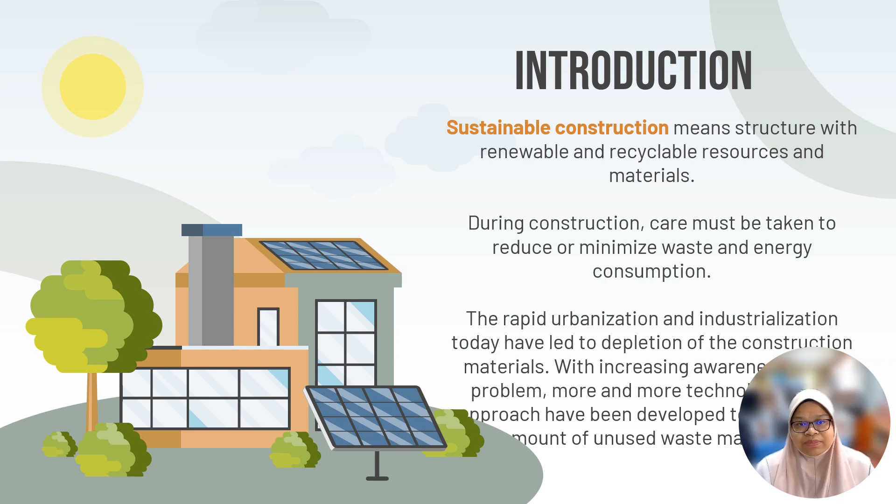Recycling industrial waste in the construction industry can be a highly promising approach to sustainable growth. On the other hand, it helps provide an environmentally friendly method of waste disposal. My focus of this writing is mortar. Mortar is an example of a product composed of cementitious materials. Mortar acts as a binder to give strength to hold bricks of different sizes and to patch holes in building walls.

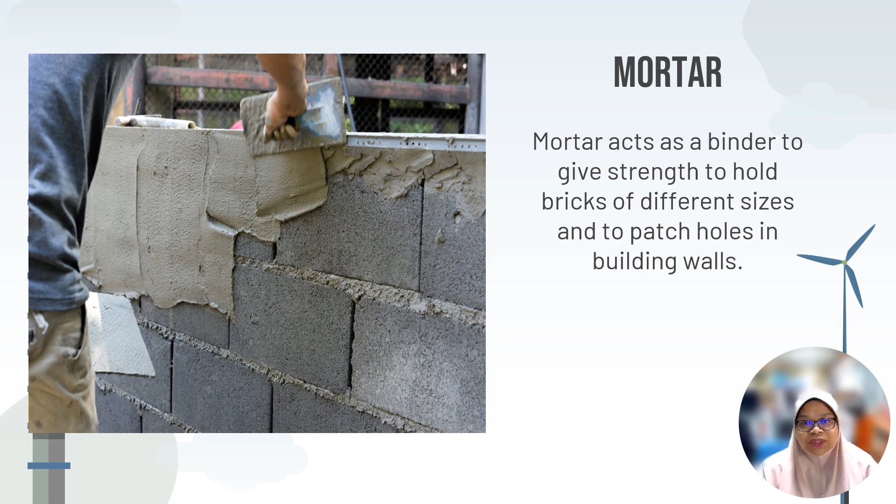Generally, for any brick strength, there is a suitable mortar strength that gives maximum strength to brickwork. The materials consist of fine aggregate, ordinary Portland cement, and water. First, fine aggregate. Aggregates are important in the construction industry because they act as a reinforcement to provide strength to the concrete. Approximately 60% to 80% of mortar or concrete is composed of aggregate.

Second, cement. The basic ingredients of cement are a combination of calcium, silicon, aluminium, iron, and small amounts of other chemical ingredients. Cement is important because it largely affects the construction structure. Unfortunately, cement manufacturing consumes a large amount of energy. Third, water is a major constituent in the cement mixing process. Water acts as glue and it may affect the properties of the concrete, especially the strength and durability.

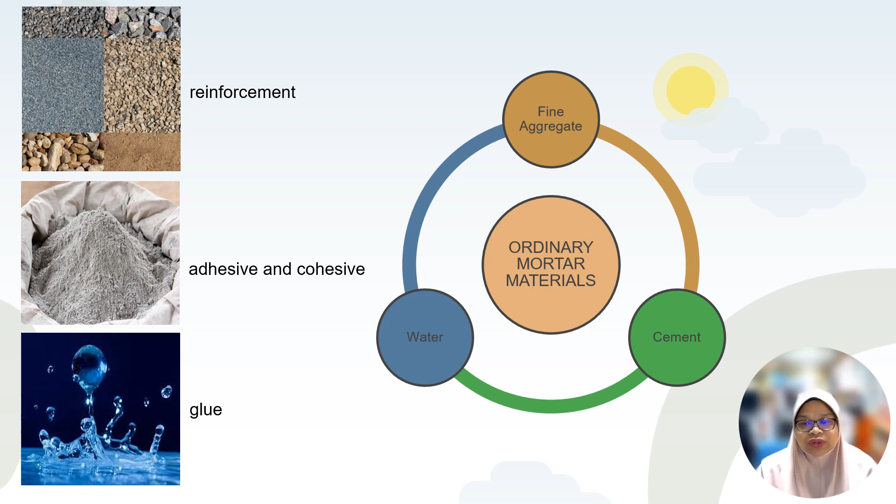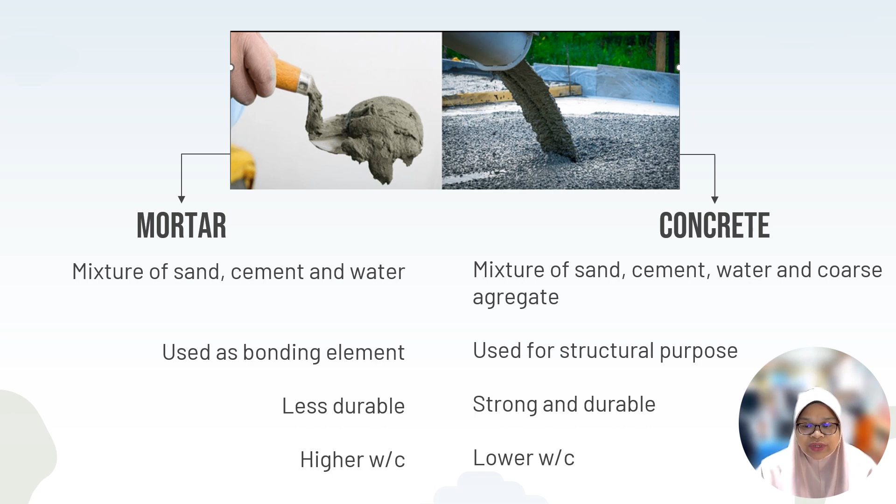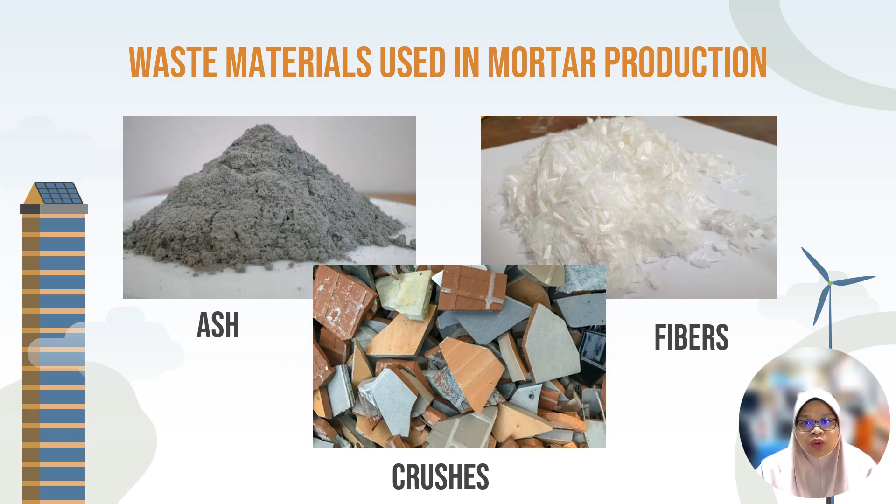This slide shows the various materials used as aggregate replacement or partial replacement in mortar production. Three forms of material waste usually generated are ash, fibers, or crushed material. Examples of waste materials in the form of ash include rice husk ash, tire rubber ash, palm oil clinker ash, and banana trunk fiber ash. In the form of fibers, PET bottles and nylon fibers from the cutting process are generated.

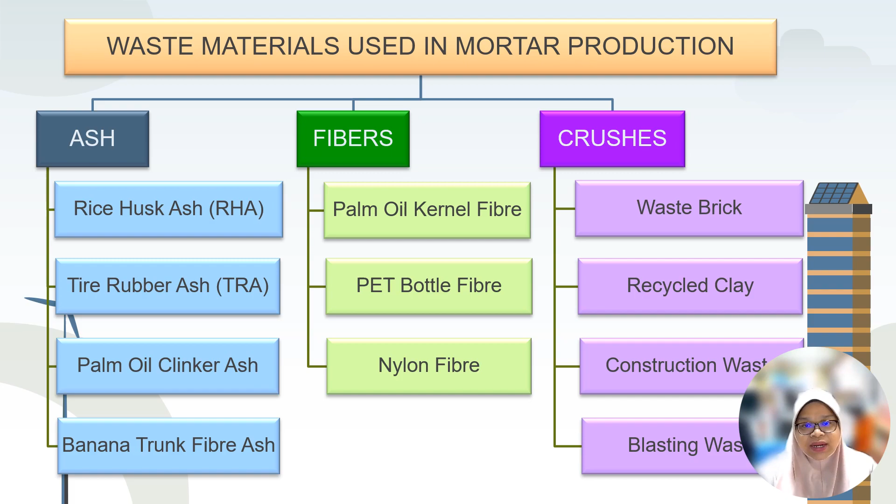Waste such as marble, granite, porcelain tiles, and clay bricks in crushed form replaces aggregate in the production of cement mortar. Basically, the waste used was obtained from a crushing process until fine aggregate was obtained. It was important to keep the waste material at a constant size since the size distribution can affect the properties of the fresh and hardened mortar.

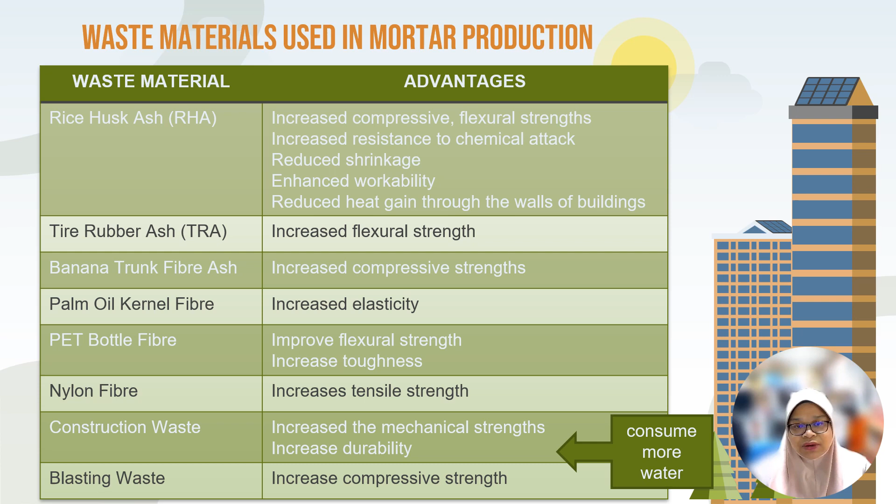The table shows a summary of the differences in the results of the studies. It can be concluded that waste materials, whether in the form of ash, fiber, or crushed materials, can increase compressive strength, flexural strength, elasticity, and workability. In addition, it was found that mortar made with recycled aggregate consumed more water to reach the same level of workability as conventional mortar because of the greater porosity of the recycled aggregate.

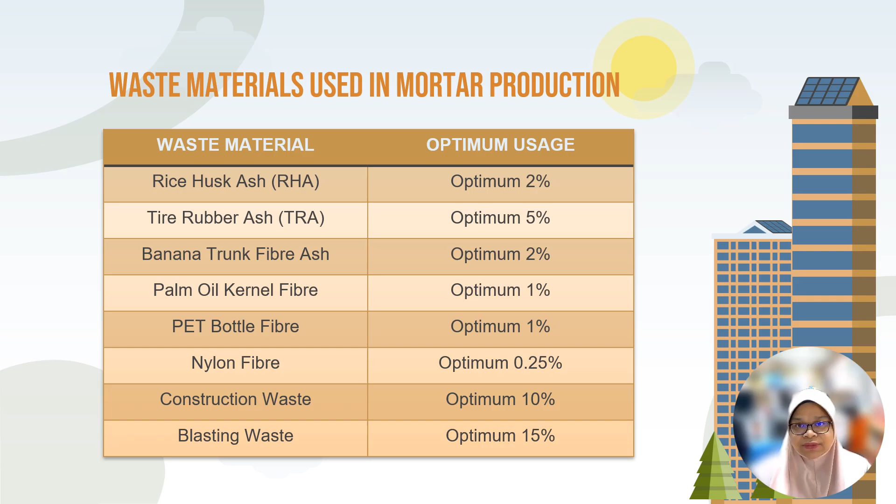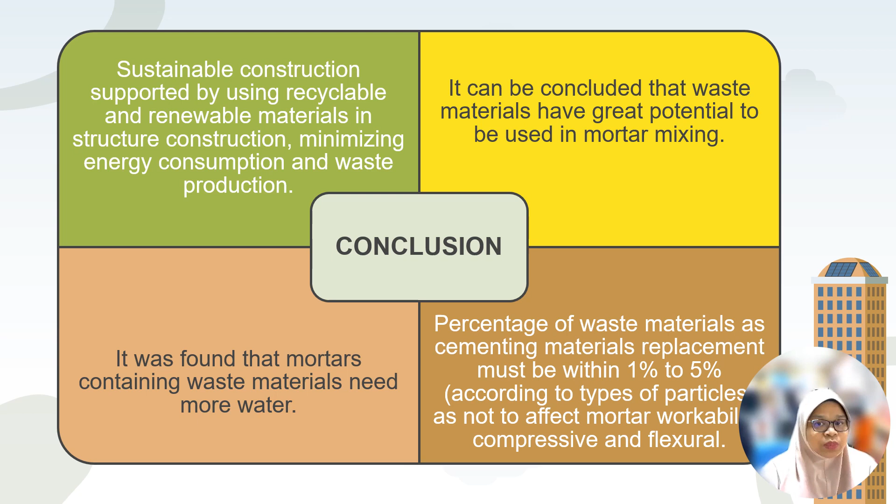It can be concluded that waste materials have great potential to be used in mortar mixing. Though mortar containing waste materials needs more water to reach the same level of workability as conventional mortar, waste materials can still be used if the mixing ratio is correct. It should be noted that the percentage of waste materials as cementing material replacement must be within 1% to 5% only, according to type of particles, so as not to affect mortar workability, compressive strength, and flexural strength.

That brings us to the end of the presentation. I'd like to summarize by saying that sustainable construction does not end after the completion of the structure, but the design of the structure should incorporate elements and materials that have a continuous influence on the structure's environmental impact. I sincerely appreciate your attention today.